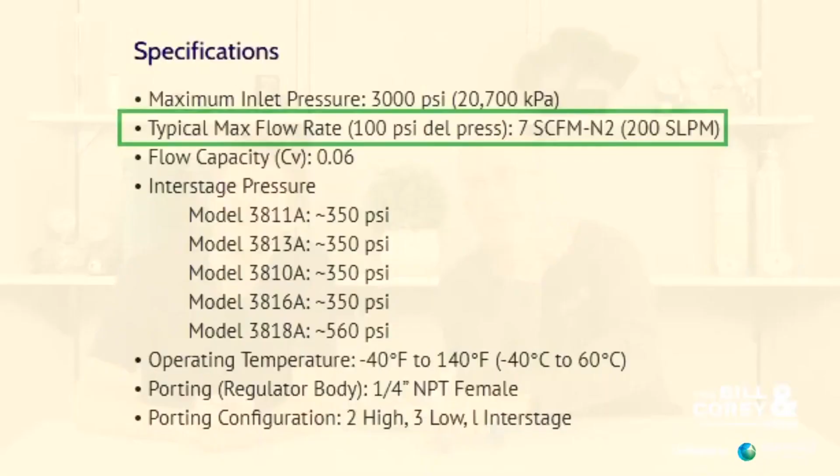So where do we get this from? Let's pop up the first slide. This is off our online store product page for the 3810A series regulator. And the key word is the first word: typical. That is the key. And we say that so that you get an idea. This is for regulator sizing.

You're thinking, I need a regulator, I need about 5 CFM. You go, this will work. If you need 10 CFM, you'll be like, maybe I should look at something else. We picked 100 PSI. That's a popular delivery pressure. You might be in a 70 to 120 range, and it's like, yeah, I can kind of figure things out.

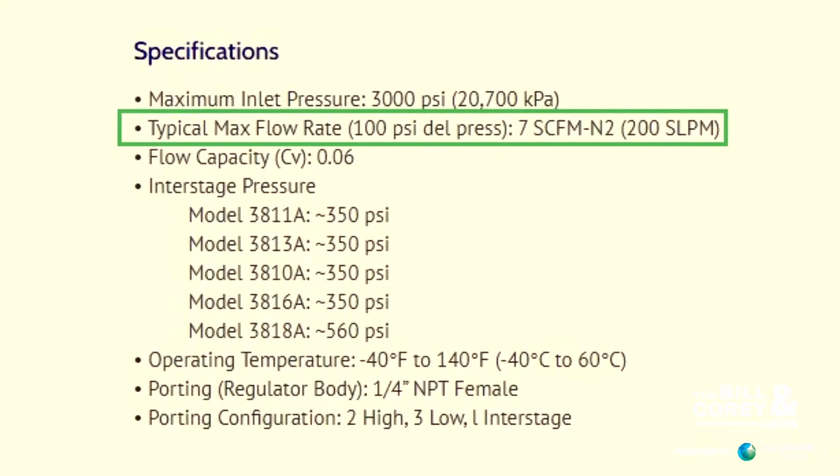Next slide. So these are flow curves. If you look at them, the 7 CFM is about 420 standard cubic feet an hour. And you say, wait a minute, these flow curves go way beyond that. What's the deal with these flow curves? Heck, I can get 1500 SCFH. So what we do is

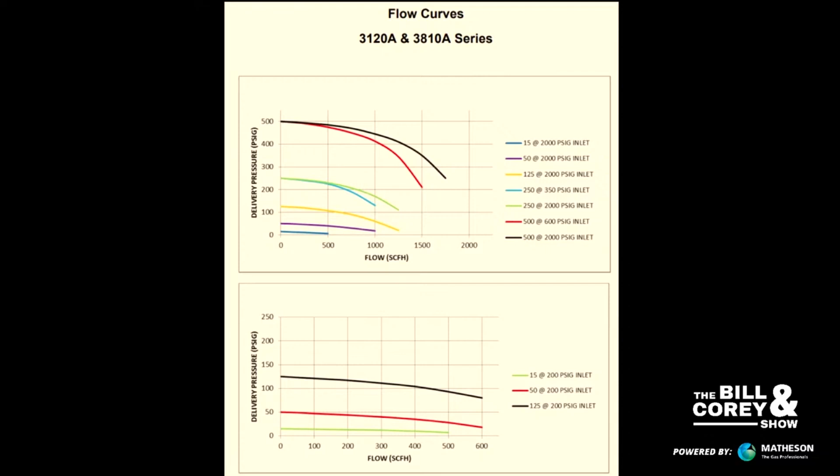companies can rate their flow rate however they want. Well, really, they can. Well, they can't just say it's 100 standard cubic feet per minute. No one's gonna buy it. Okay, you can kick off the slide. You see our wonderful faces. So yes, they could rate it however they really want.

So the CGA, Compressed Gas Association, publication E4, which is a standard for gas pressure regulators, their suggestion is the rated flow capacity can be defined as 80% of the flow rate with the lowest inlet pressure at which it is to be used. So it's kind of giving a standard without saying it has to be a standard, because people are kind of all over the place, and there's different things going on with regulators.

So you want to put up the next slide? You have to look at the slide, not us. So this is part of the flow chart, and you can see it's 125 at 2,000 PSI inlet. That's like a full cylinder. I'm guessing about 520 SCFH is where it crosses that line. I'm looking at 125 PSI static delivery at zero flow. 80% is like 100. So that's looking at 520. That 520 is like 8.7 CFM.

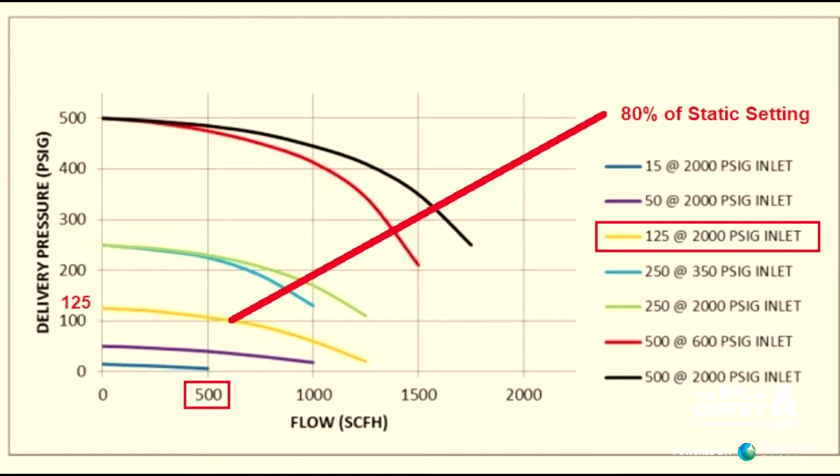Well, the reason why we don't do that, it's supposed to be the lowest inlet possible. So you have a dual stage regulator, and it's going to kick it down from cylinder pressure down to about 350-ish. So yes, this is higher than what we rated it at. How come we don't rate it at 8.7 CFM? So let's go to the next slide.

Okay, so this inlet pressure is 200 PSI inlet. That's really as low as you can go. Your cylinder at that point is going to stop flowing. It's 10% of full. You don't have a lot of flow there. So when you pick your lowest pressure, if you're trying to do this at home, you really need to be below the interstage pressure. Call your local regulator company. This chart was made at 200 psi inlet, so that sounds reasonable.

In there, you can see 80% is lower. It's like 420. So that's why we rated it at 420 standard cubic feet an hour, about 7 CFM. We rate it at a lower aspect of the flow rate. It's not the worst case scenario, but it's going towards the worst case scenario down that low in pressure.

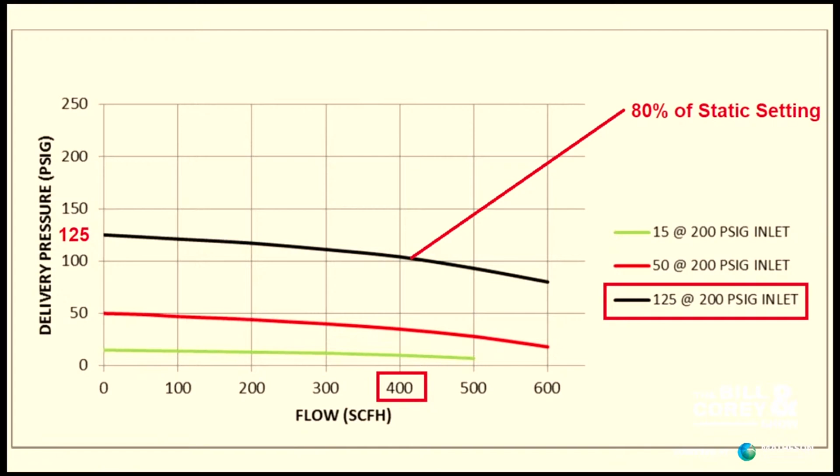So there's nothing stopping you from saying, I want to stop flow when it gets to 400 psig, because I know my flow rate's going to drop below what I need, so I'm going to use a cylinder only to 400 psig and have some kind of system. There's nothing stopping you from doing that if you need a higher flow rate. That's why we had the flow curve. I'm just trying to explain it in a different way that might help people understand it, because flow curves are hard to understand personally.